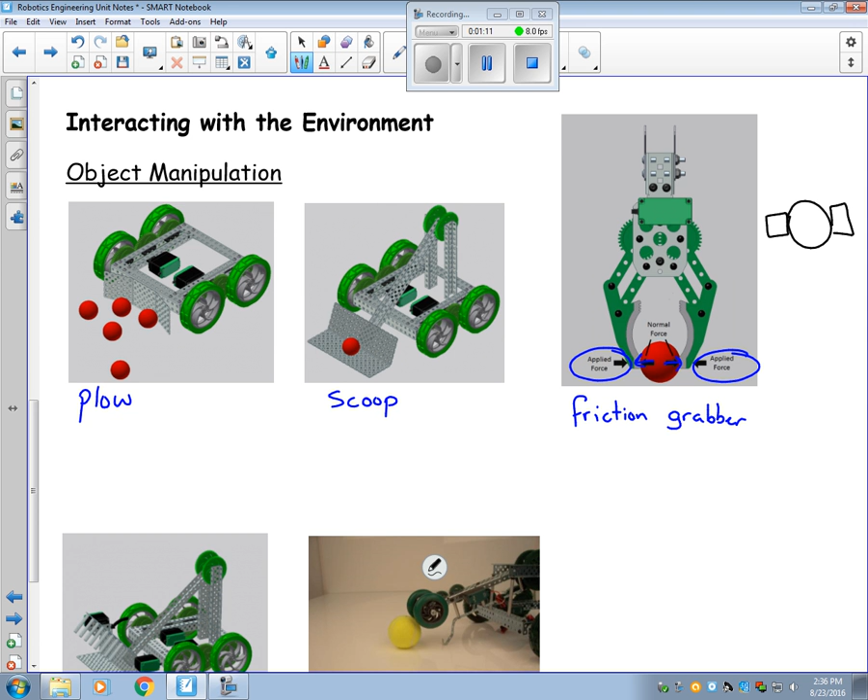This type of manipulator is a little more involved. We have an applied force that pushes on the ball, so that then creates normal forces against the ball. So if I were to take a look at this from a different perspective, let's say looking at it edge on, we would have our normal forces, we would have gravity trying to pull this ball down, and then we would have friction, which prevents it from falling down. And the greater the normal force, the stronger the friction is.

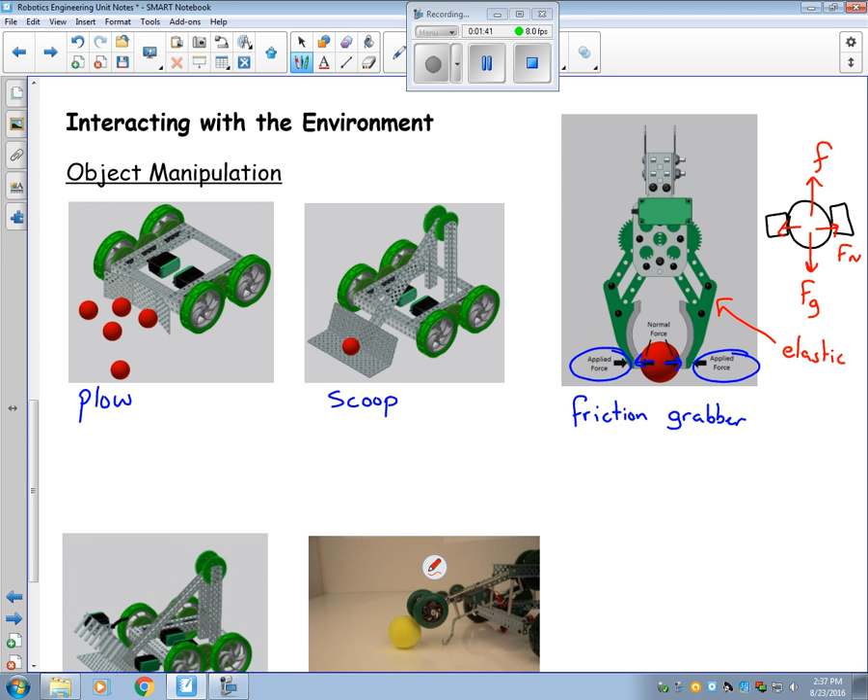One thing you have to be careful with these, they need to have some elastic give, or else these parts will break. So you have to be careful with a friction grabber. You have to make sure that there's plenty of elasticity to it.

This next type is called a top jaw grabber. It's just like a scoop, except you have an articulating top jaw, which helps to cage whatever object you have in. Kind of like the top jaw, we have the roller claw. And just like with the friction grabber, you need to have some sort of elastic give with this one.

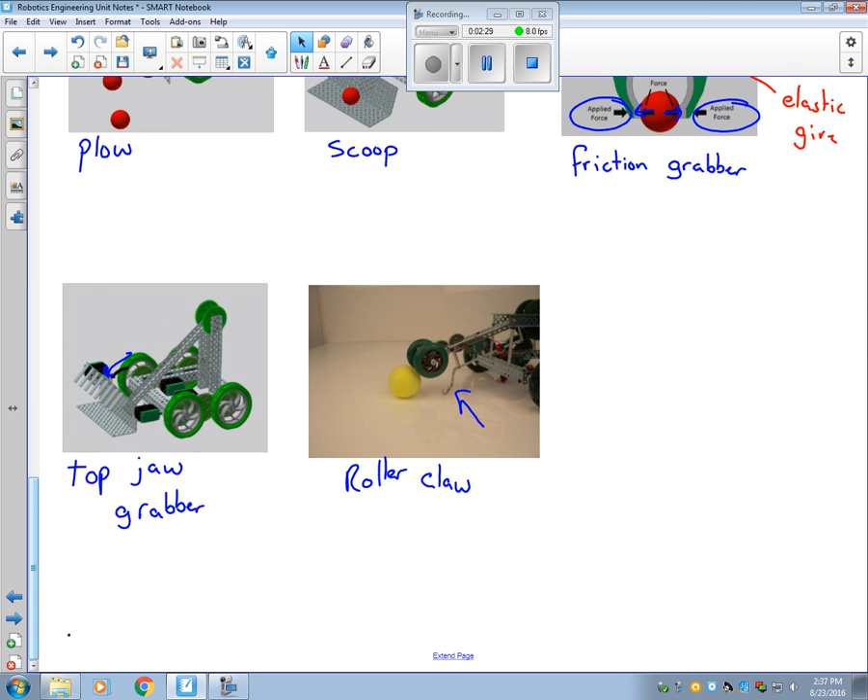Moving on, we now have our accumulators. Once the robot has picked up an object, how do we hold it? What do we do with it? So one type of accumulator we have is called a magazine. And this simply just holds the object. There's many different types, but basically it just holds it.

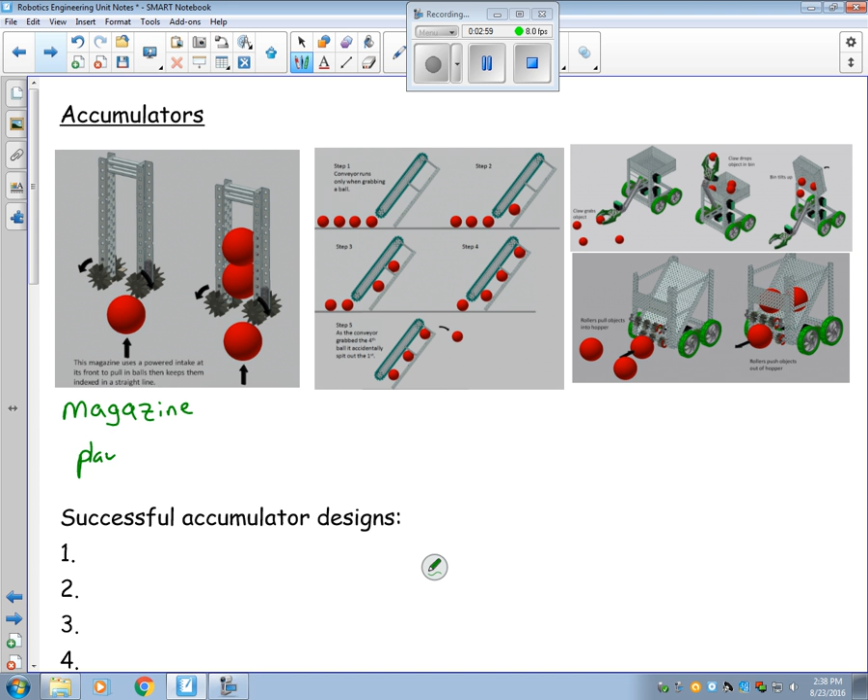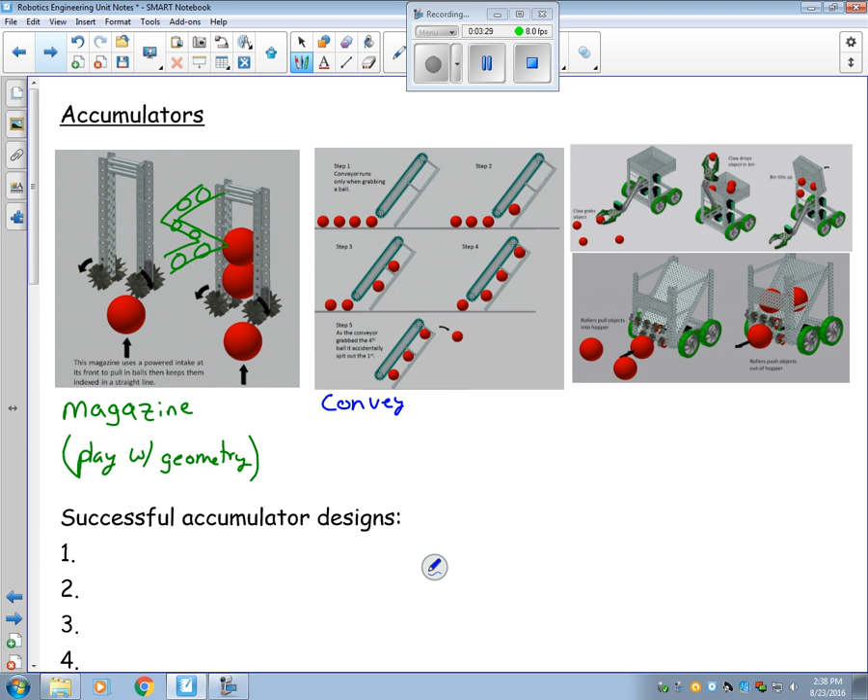And you can play with the geometry to hold more objects. So imagine if this were something that's zigzagged up. It could have the same height, but we can hold a significantly larger number of objects in it. Another type is a conveyor belt. When it comes to conveyor belts, we have two types, indexing and non-indexing.

In an indexing, it only runs when you're trying to grab objects. So this right here is an example of an indexing conveyor belt. What's kind of nice about this is that it'll keep the objects evenly spaced. A non-indexing is something that runs continuously.

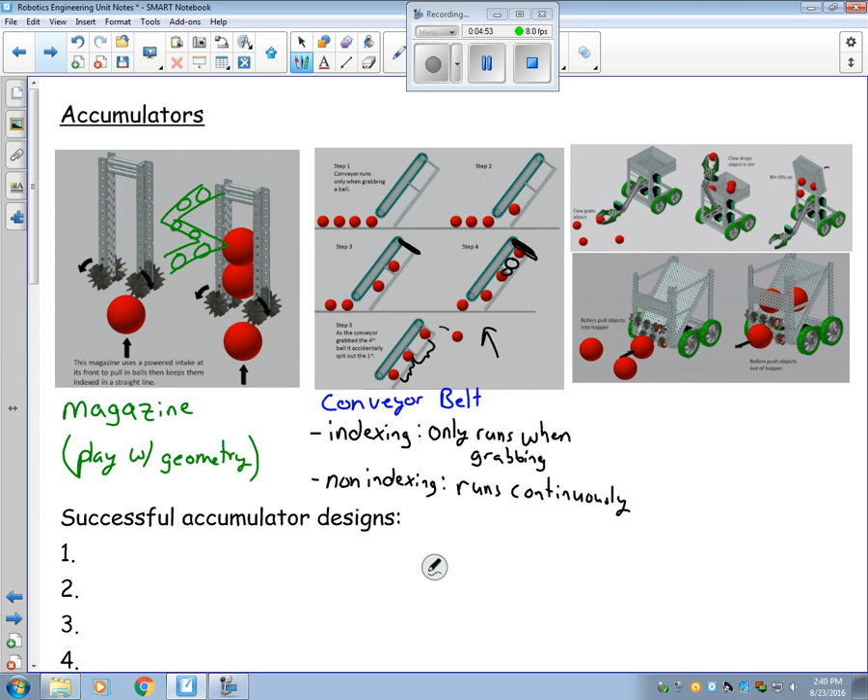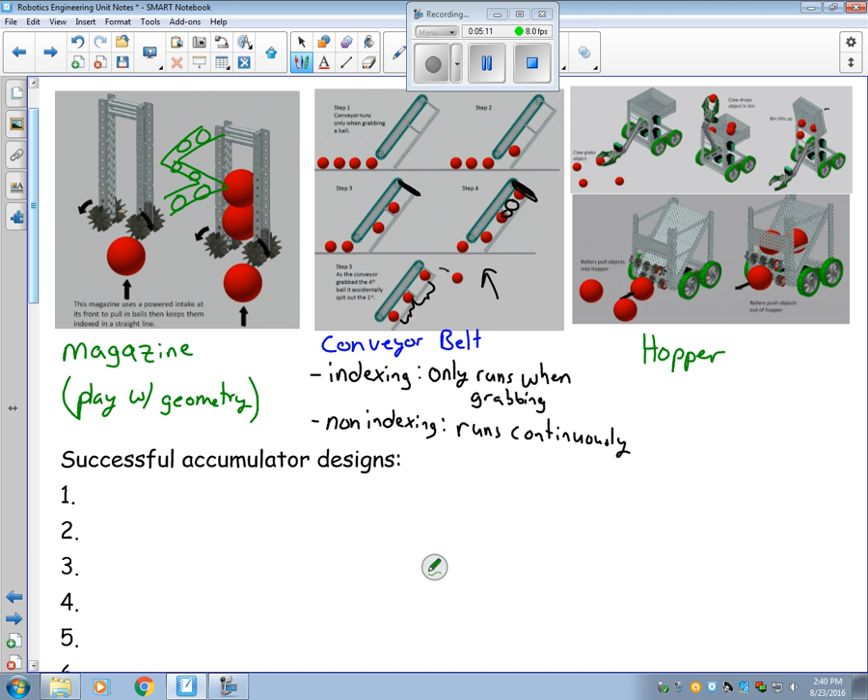So you would have some sort of stopper at the top, like this, and then as the balls come up, they would start to gather at the top. But it runs continuously. So indexing, it indexes, so it keeps space between the objects. Non-indexing, it just runs continuously. Another type is a hopper. There are many different ways of designing a hopper, but you can think of the bed of a dump truck as being a hopper.

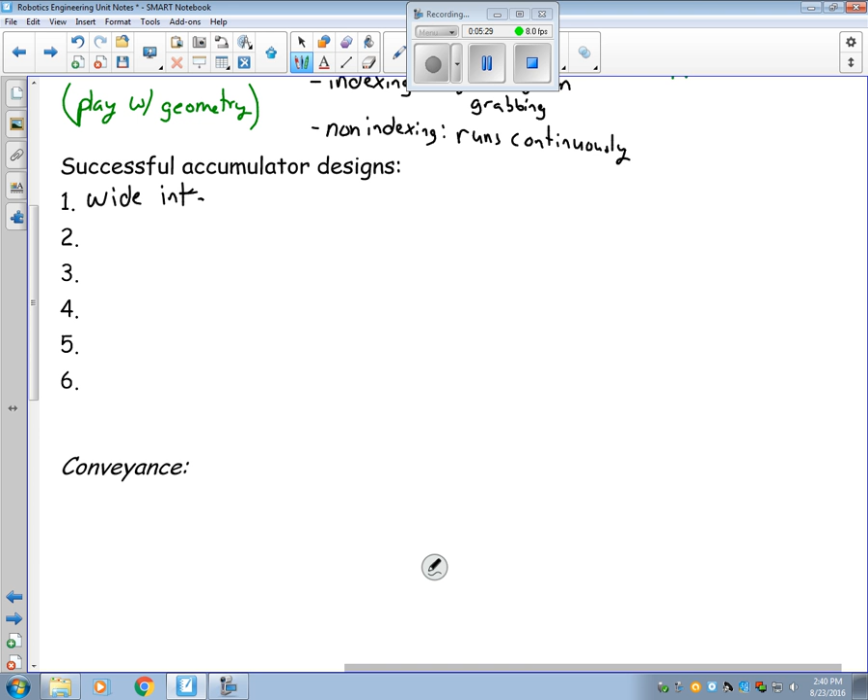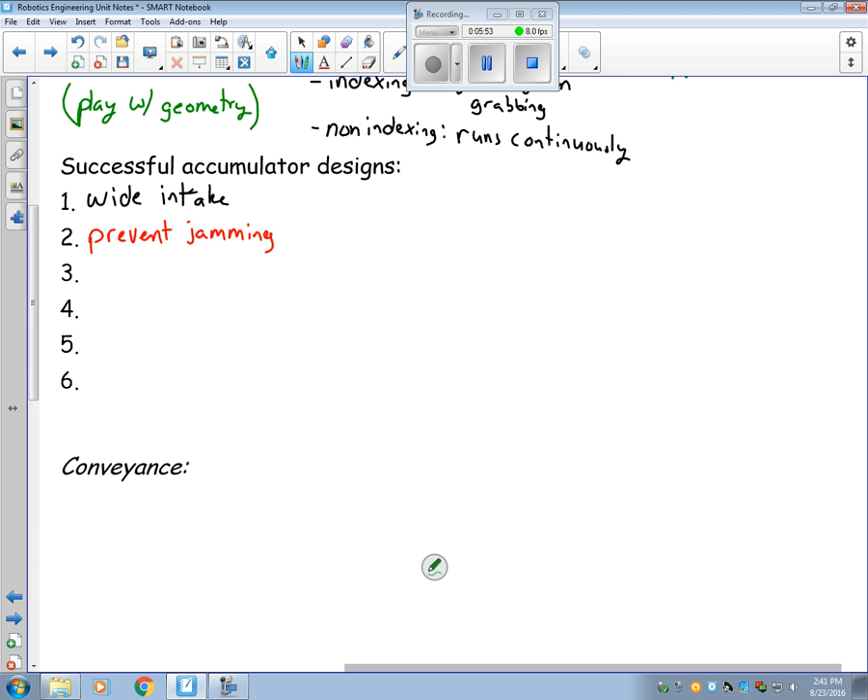We have several successful characteristics of an accumulator, things that really help it work well. First off is a wide intake. You want it to have a wide mouth to be able to get a lot of different objects. Second is some way of preventing jamming, some sort of mechanism so that it doesn't jam and stop working. The third one is a high speed. It needs to move fast. In fact, it needs to move twice as fast as your fastest speed.

You need to be able to gather multiple objects at once. You do not want it to slow down as it gathers.

And then finally, you want to be able to pick up objects of different sizes. So with that, you want to have one accumulator that can do more than one thing.

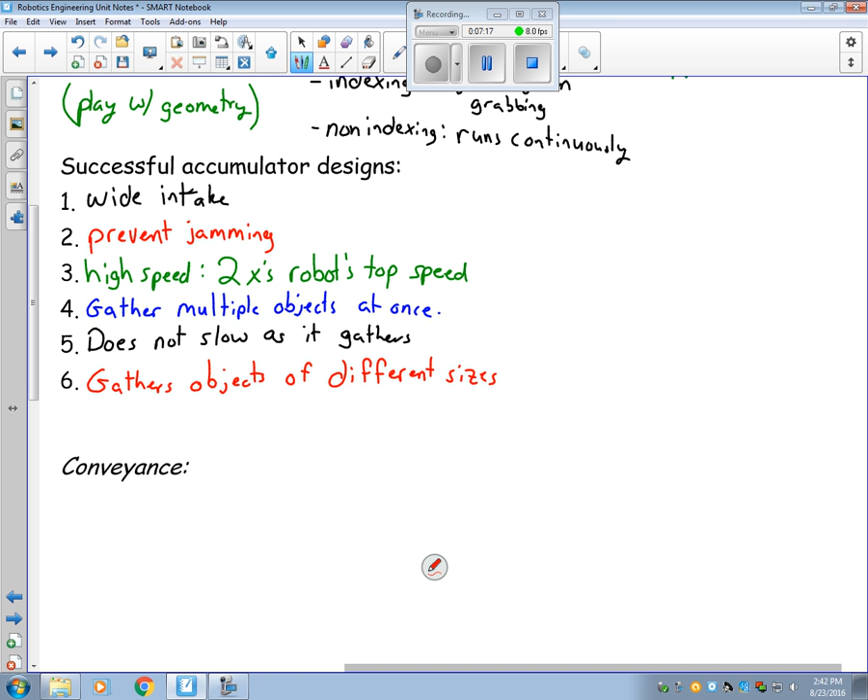Now, we mentioned conveyor belts briefly, so I wanted to go a little further in depth with that. Conveyance, that's basically your conveyor belt configuration. So this is going to play a role in how the system behaves.

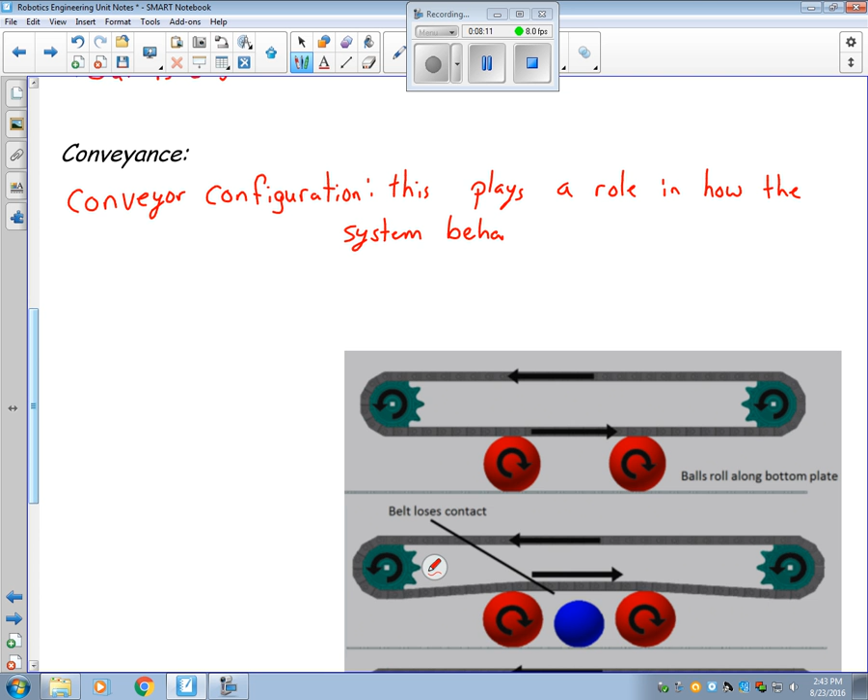So the first type is a single belt system. In this one, we have a flat wall. We have a single belt. And with this one belt design, since the balls are rolling along a plate, they will only move half the speed of your belt. So if the belt is moving at 5 meters per second, the balls will only move at 2.5 meters per second.

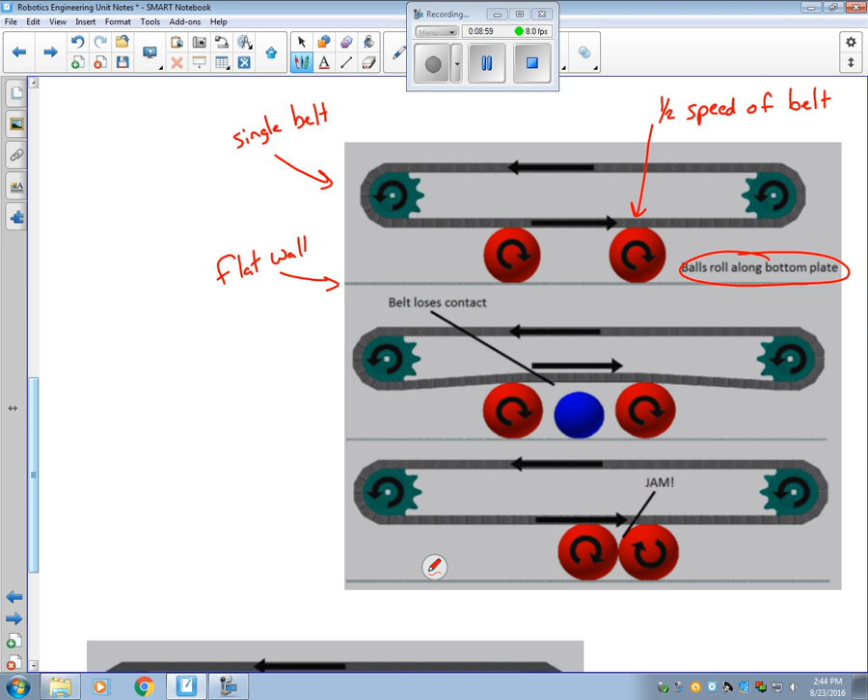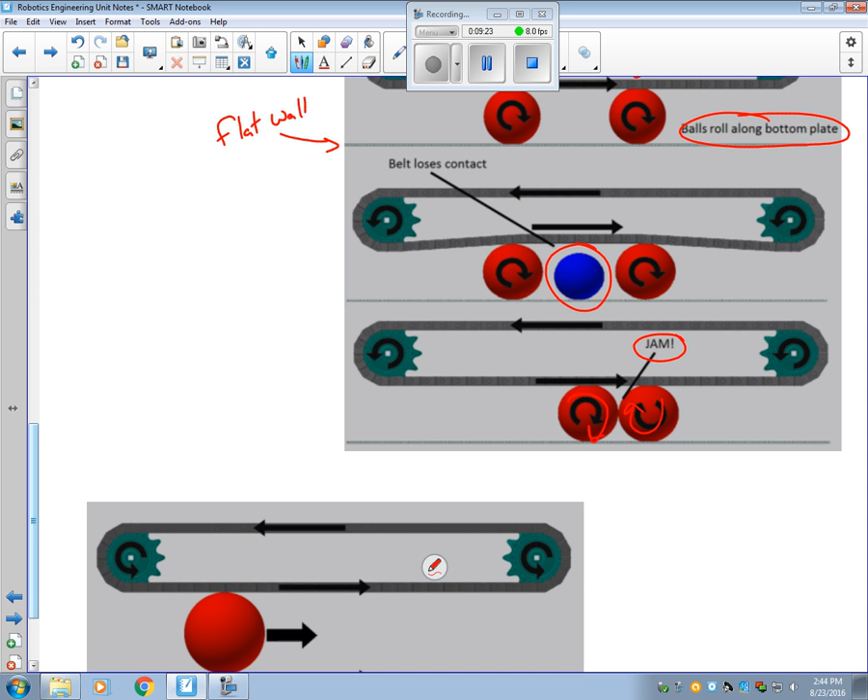One problem with this design is if you have objects of different sizes, smaller objects will stop moving. Another design flaw is that if two objects that are rolling hit each other, you will get a jam. Because as this ball is trying to rotate, let's say clockwise, this one will be trying to rotate clockwise as well, and that's going to cause some friction in between the two objects. So a way to get around that is a two-belt design. In a two-belt design, it's going to be less likely to jam.